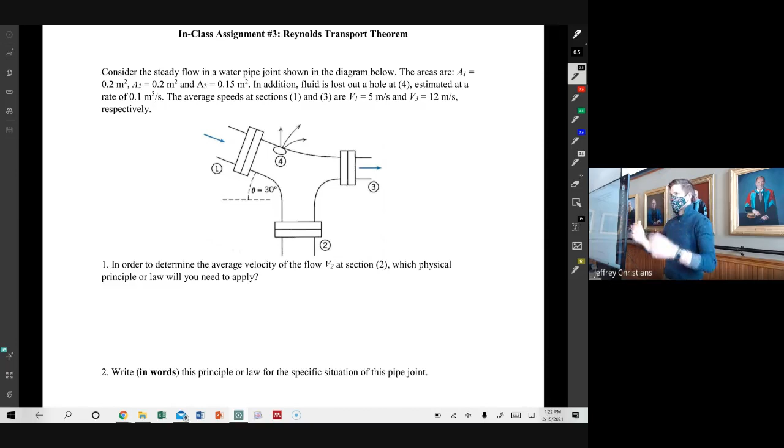So we're going to take a simple problem and make it a little more complicated, but hopefully in the end that gives us more flexibility with what we can solve. We can solve things we can't just think through and rationalize our way through—more complicated, more interesting things.

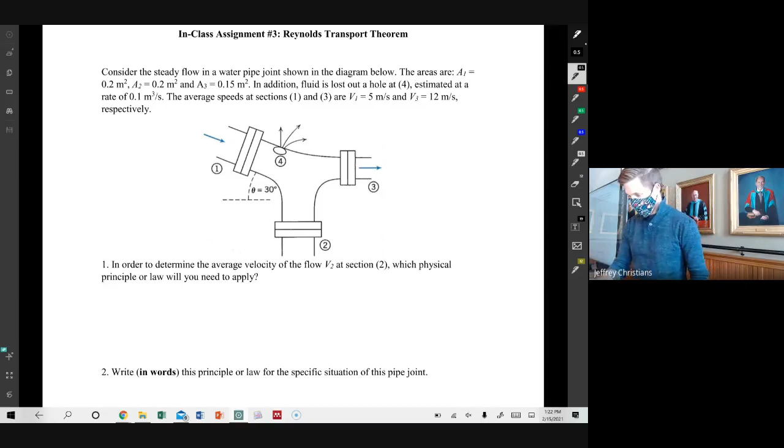So this is moving from statics, which was chapter 3, to chapter 4. Our discussion is going to be on what we'll call the Reynolds transport theorem. That's what we're going to be talking about in chapter 4.

We won't define it today, but we'll at least get started on our way to what that even is. It's a way to apply physical laws, like you would in physics, to fluids. So, what do we typically do? We typically apply physical laws to a mass.

If we wanted to do conservation of energy, we'd look at a specific amount of mass. If we wanted to do conservation of momentum, we'd look at a specific mass and say conservation of momentum on that mass, with a force acting. For F equals ma, we'd look at a specific mass and ask what are the forces, what's the net force on this specific object. So typically in physics class and other engineering classes, we're looking at this object and looking at forces on it, energy in it, but we're looking at a well-defined object.

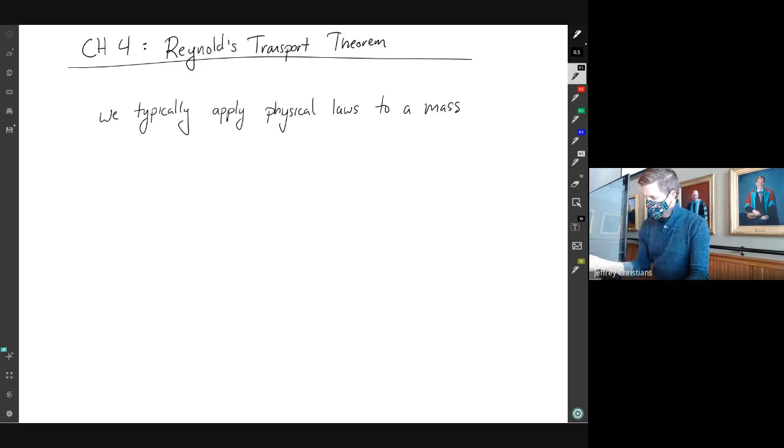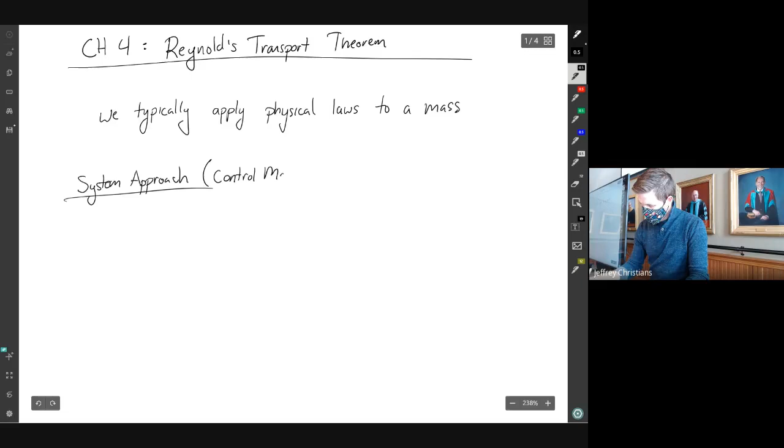This is what we call the system approach, or the control mass approach. This is normally how we apply the laws of physics.

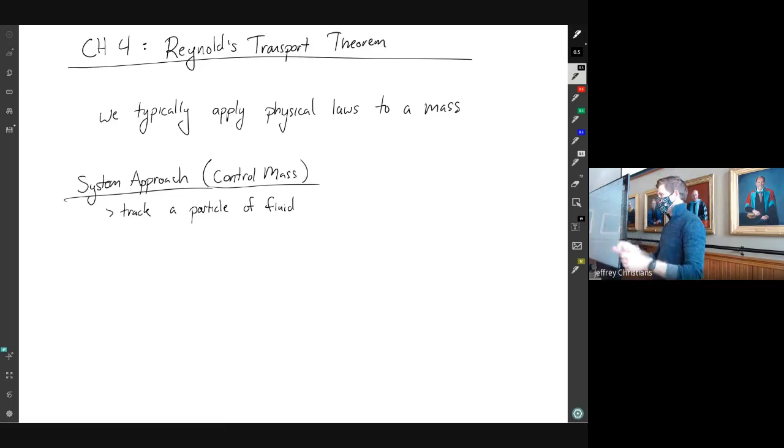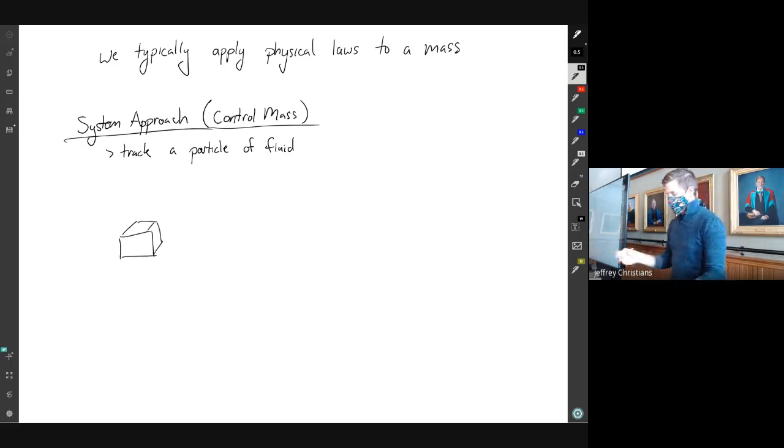If we were to do something like this in fluids, what we would do is track a particle of fluid, or a group of fluid. We would look at this chunk of fluid and say okay, it's right there at time zero, and something's going to happen to it. Forces are applied, and it's going to move somewhere else. So we'd look at this moving from there to there. Basically we're trying to watch where it's moving, this single group of fluid particles.

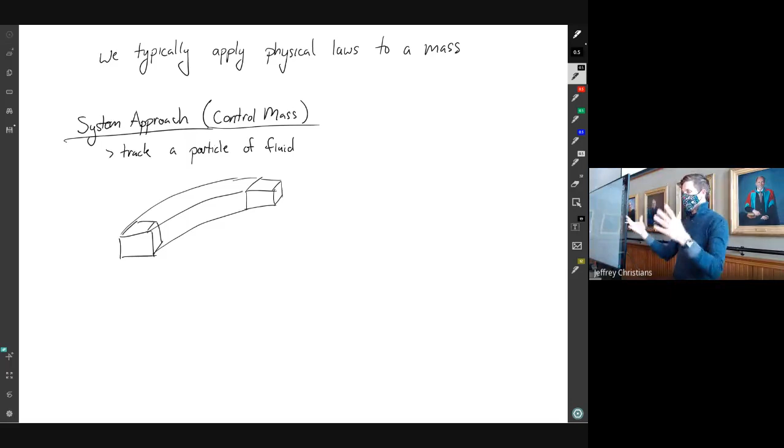With conservation of mass, we'd say the mass of that chunk of fluid doesn't change. If we were looking at F equals ma, which we will later, we'd say the forces on that object are related to the acceleration of it as it moves. So we'd have something of defined mass and watch it move through a fluid.

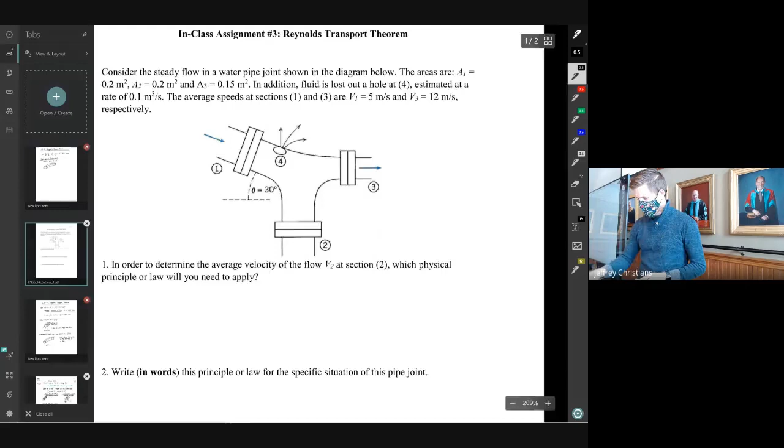What we did when we solved the previous problem is we did not actually track the fluid. We could have tracked the fluid coming in and watched where it went, that particle coming in and having to come out somewhere, tracking where it comes in and where it goes out. That would be one way to look at this, but in fluids it's often easier, not always, we'll use both approaches, but often easier than watching an individual particle move along its merry way.

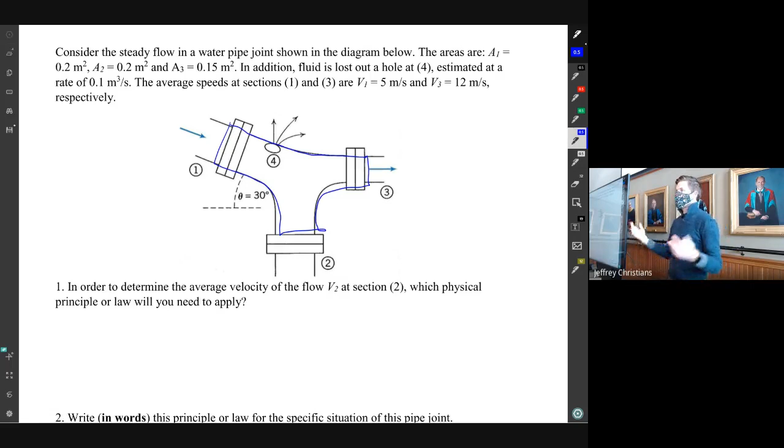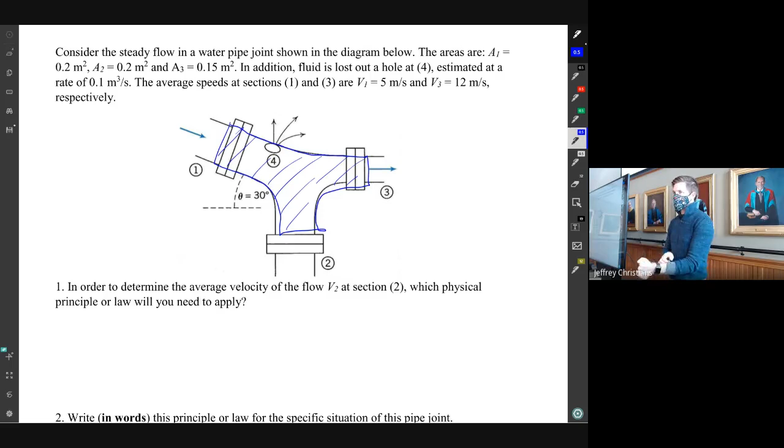Instead, we're going to do what you guys did, which was say we're going to look at this volume, and say what's coming into that volume and what's leaving that volume. So a lot of times in fluids, we're going to watch a specific region of space and say what comes into that region and what goes out of it. We'll do it with mass like you did here, but we're also eventually going to do it with things like F equals ma, with momentum, and with energy using the first law. You could use other physical laws too, to understand how fluids move and flow and how forces work.

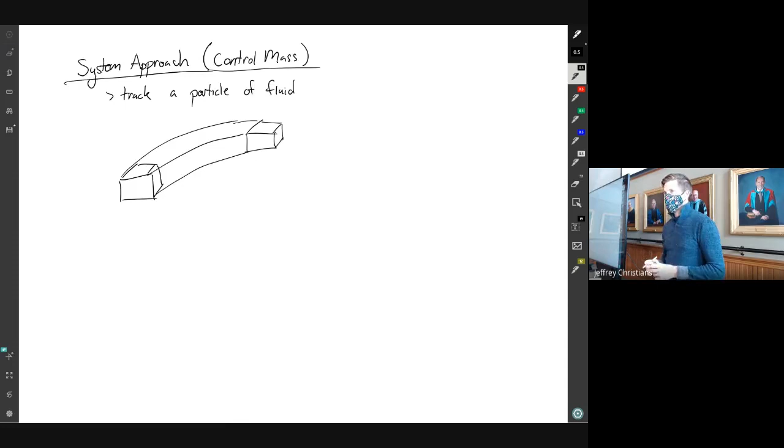So that's kind of what we're building to. The system approach is how we normally think of physical laws, but a more useful approach for fluids, a lot of the time, is a control volume approach.

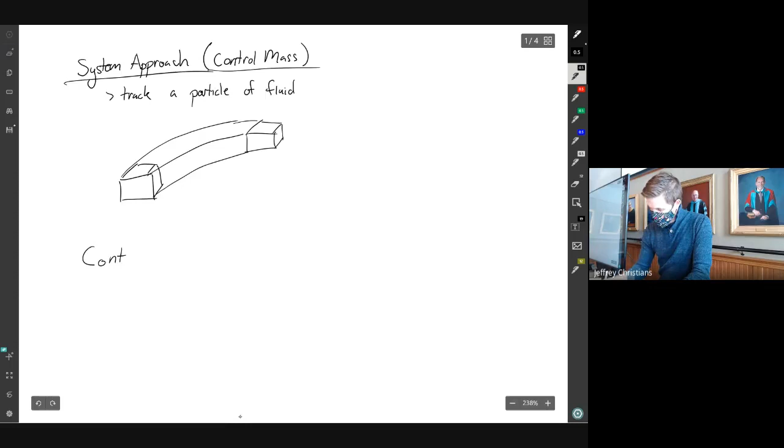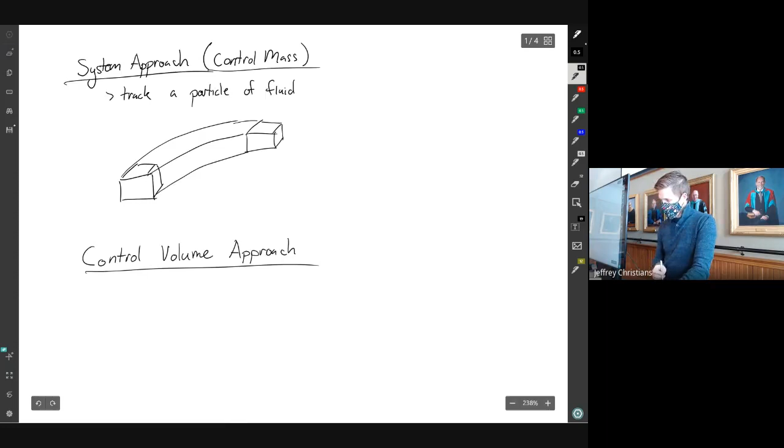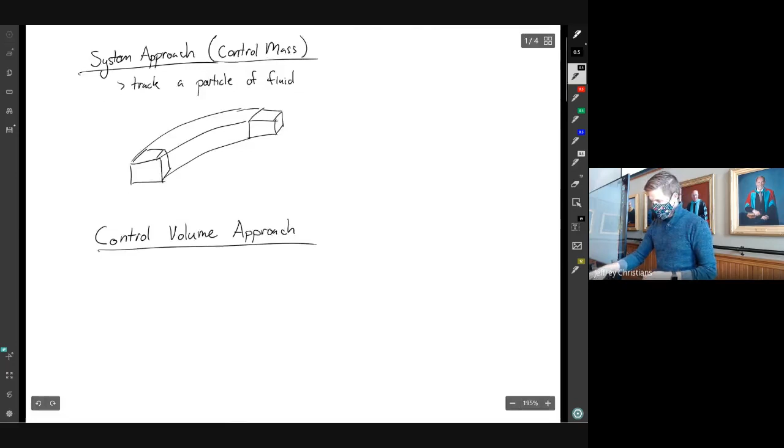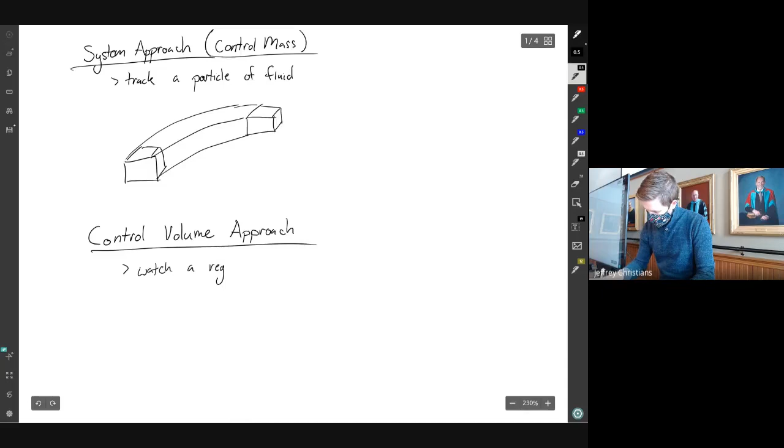Okay, so in a control volume approach, we are going to watch a specific region of space. That's how we're going to be looking at the problem.

So all of our physical laws change a little bit. Because if you think of conservation of mass, that's the easiest one. Conservation of mass means if you have a particle of a certain mass, the mass doesn't go up or down, it's conserved. If you have conservation of mass on a specific region of space, now you have to say, okay, what's coming in and what's going out, and is there any accumulation inside of our region of space? You have to account for more things.

So that's what we're trying to do, is say, take something, how does that work? How does conservation of mass work for an individual particle? Mass is conserved. And then how do we expand that to watching some arbitrary region of space?

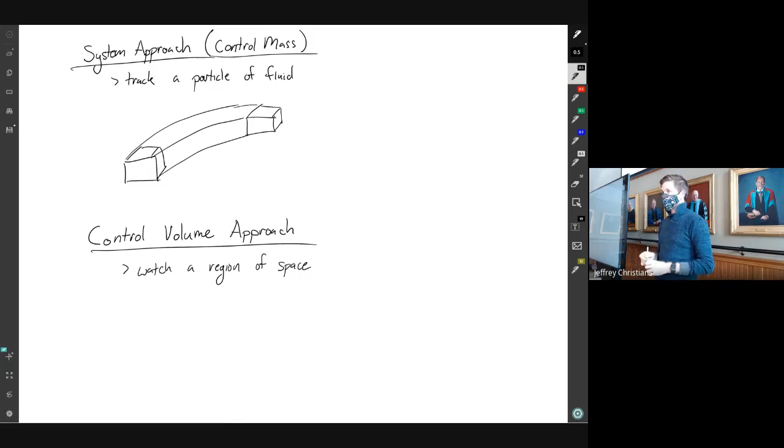So this would be, just to draw a simple picture, we would have some region of space where this is our CV. It doesn't have to be a box. And we would have flow kind of going through that box. And we would be watching the box, not really watching the flow.

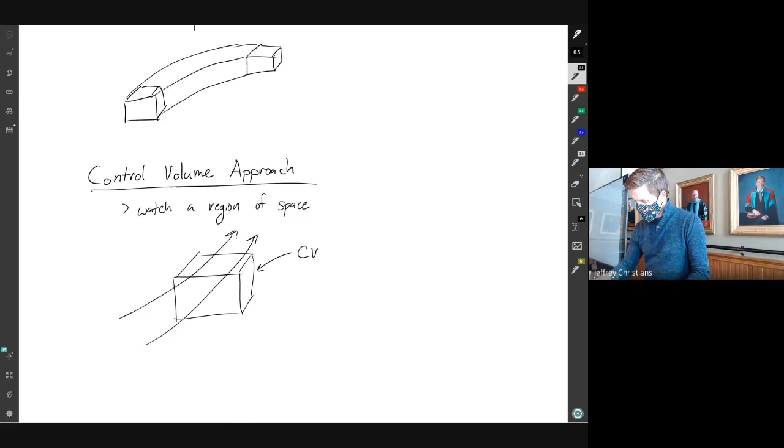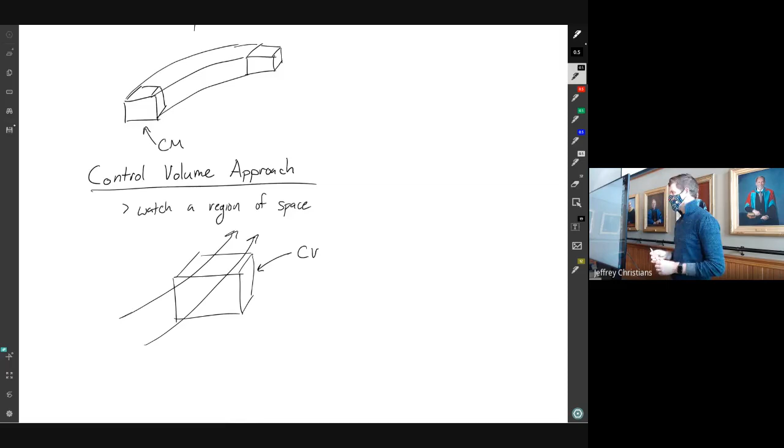So the first one, we're watching this particle. So this is our control mass particle. We're watching that particle move through space. The second one, we're watching a region of space and watching things move through that region of space. There's kind of a subtle difference, but it will become important in how we think about it and how we use that. We'll end up using both of these approaches, but we'll start with the control volume approach, and that's what we're going to work on for the next while.

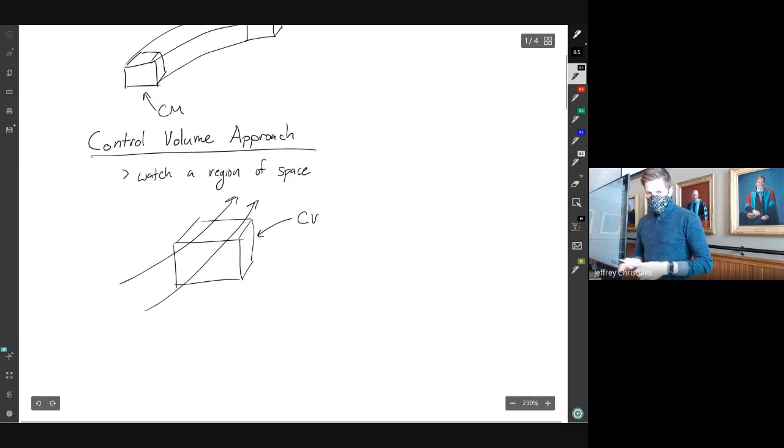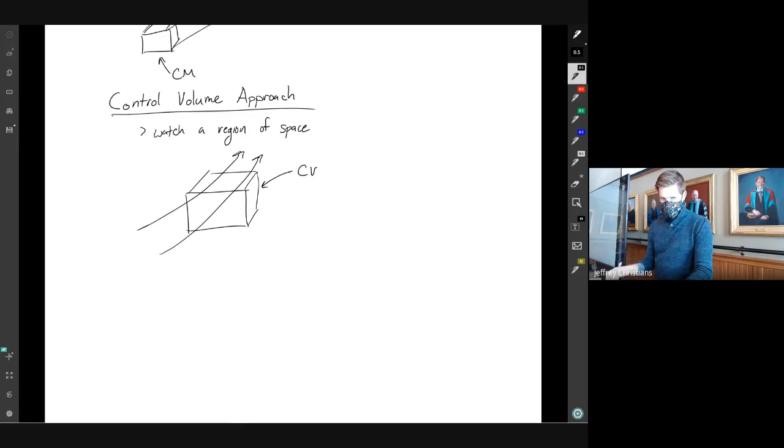Okay. So if we wanted to write an equation for this, in words at least, we could write that. So we could look at the CV picture.

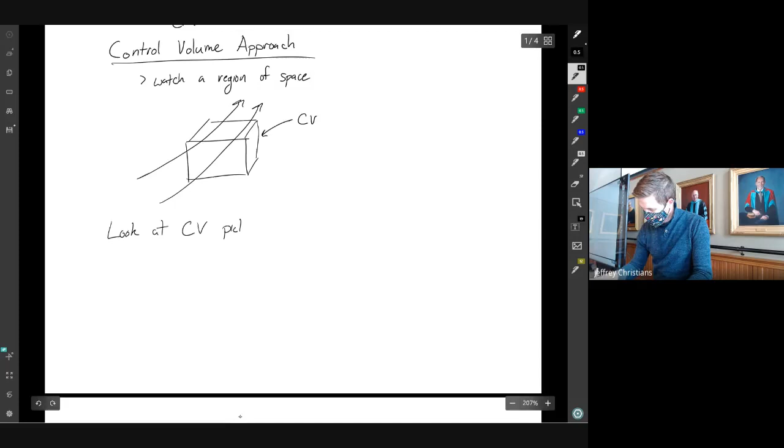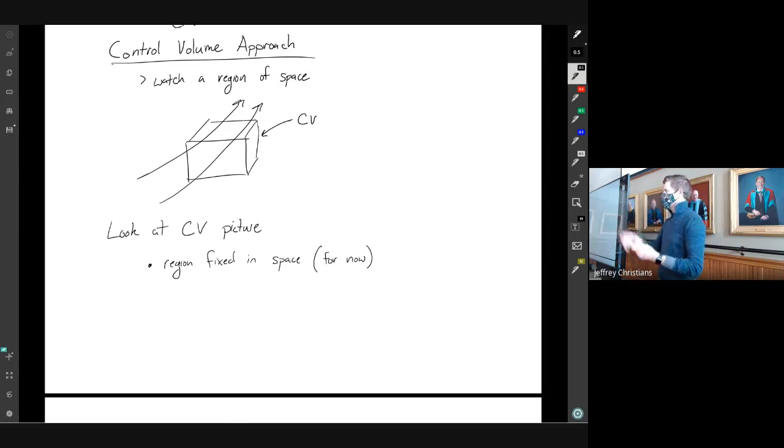So we're going to say that this is a region fixed in space, stationary, just like a set region of space. For now, eventually we can actually take that region of space and we can move it. Sometimes that will make our lives easier. For example, if you want to figure out thrust from a rocket engine as your rocket is taking off, your rocket's moving. So if you're just looking at the launch pad, a couple seconds later your rocket's not anywhere near the launch pad, and you go, well, that's dumb, you should follow the rocket. So eventually we'll actually move along in space, but for now it's a fixed region.

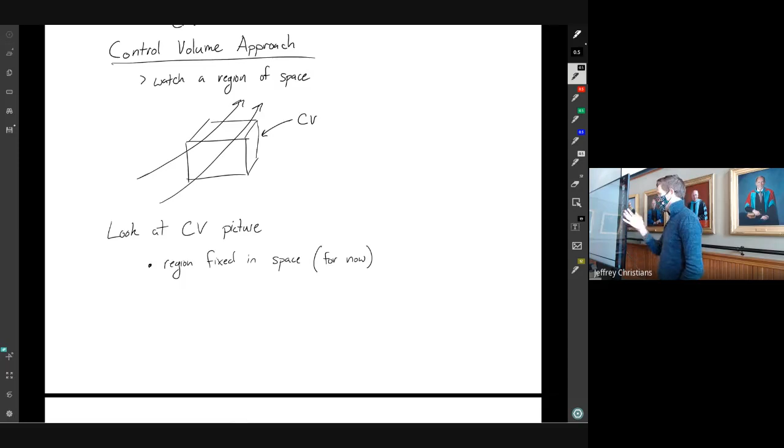Okay, so we're going to look at a mass moving in or out of our control volume, crossing the boundaries of our control volume. And if things are moving, they're moving with a velocity. So we're going to have velocity measured relative to the CV surface, what we'll call the control surface.

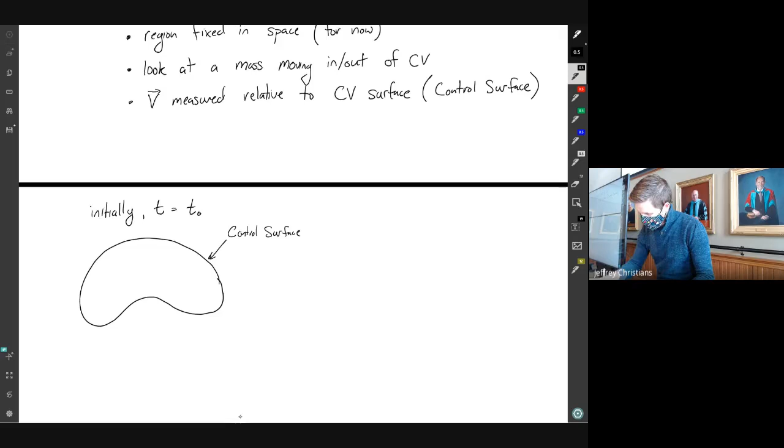Okay, so I'll draw an arbitrary picture that hopefully will help us think through this a bit. Let me draw that better. I want to draw a shape that I can draw twice, like a lima bean. So this is initially, at time t0, the initial time. This is our control surface, the black line, the surface of our shape. The shape itself is the CV.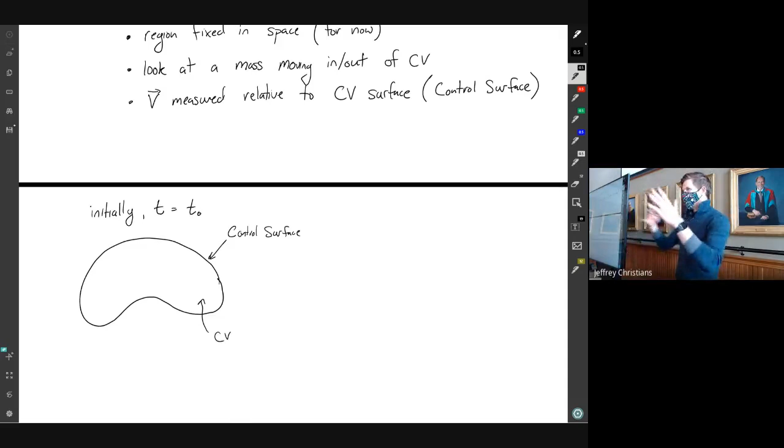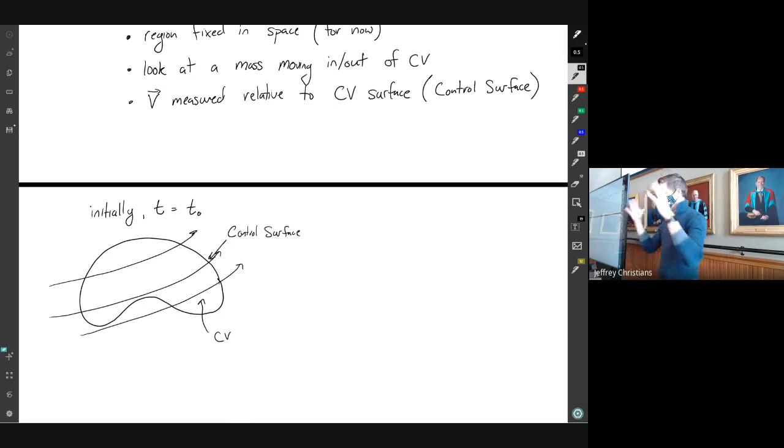We, in general, have fluid moving in and out of that, so just for the sake of drawing it, we can draw some flow superimposed on top of that, those would maybe be the streamlines. Okay, so initially we're going to say this is what our control volume looks like. It's in a flow, this funny lima bean looking shape. Let's take a snapshot there, and then we'll take a snapshot a little bit later and see what happened.

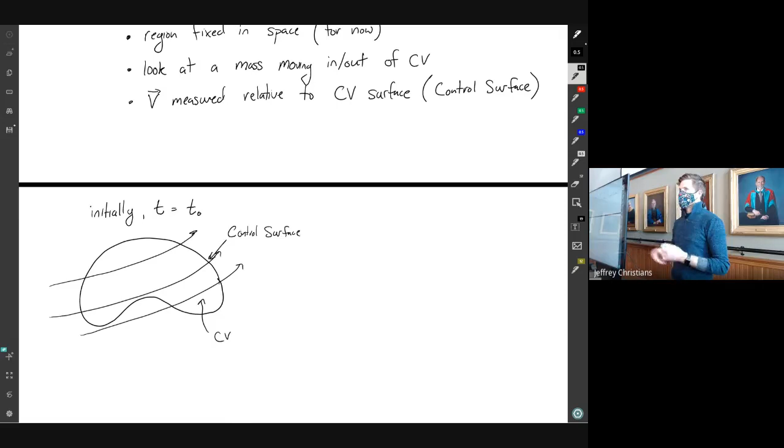So a little later, at t equals t naught plus a little bit, plus d time, if we try to take the same shape, and I'll do my best... that's not very good, try again.

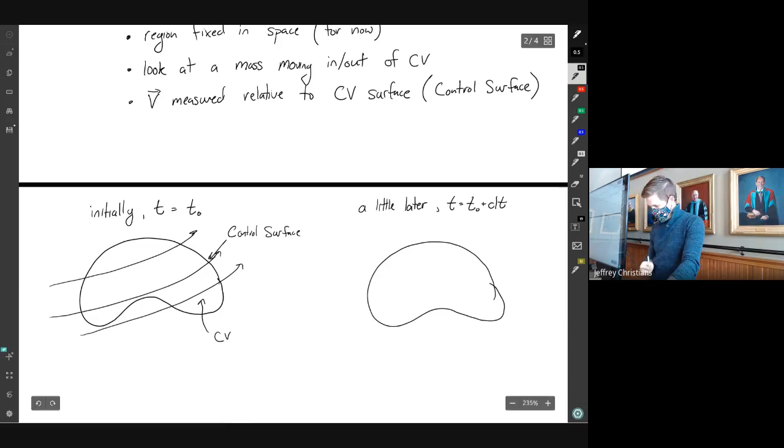Maybe okay, you can tell it's at least supposed to be the same shape. So what happened a little bit later? Well, our fluid moved. How did it move? It moved, well, here's our velocity still.

Say that didn't change. So the fluid is moving that way, kind of along with those velocity vector lines. So again, I'm just going to kind of eyeball this, but I think you'll get the idea. This would be something like that. So our initial fluid is the dotted line.

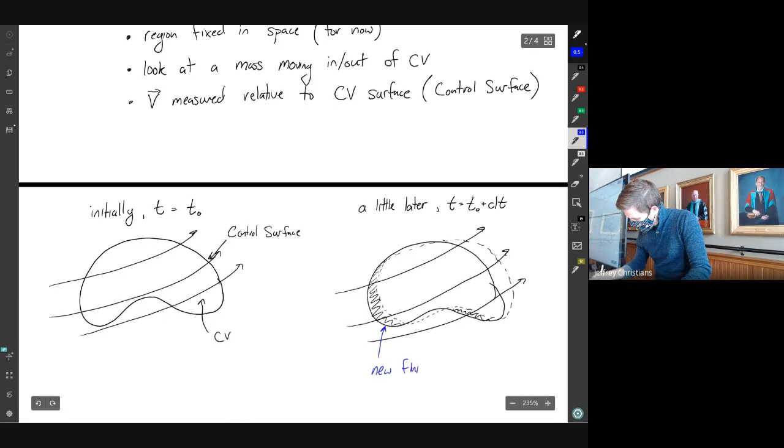Our CV is still the black line. So we would have here and here. This would be, put in blue, this is we have kind of new fluid that's entered into our control volume. Okay, and then here, we had fluid that left our control volume, or fluid that went out of our control volume.

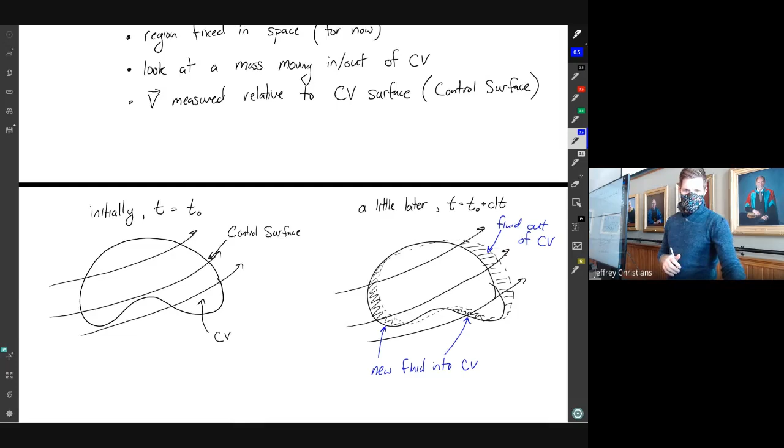What we want to do is write this in calculus, calculus and vector notation. So we're going to have, I guess, two things. We're going to have to be able to look at what's inside of our control volume.

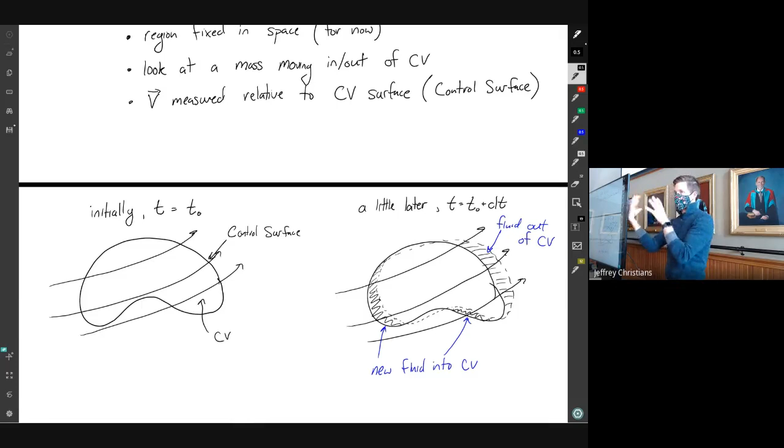That's what we care about, really. We're going to have to be able to look at how does that change if it does, because in general we could have more mass building up inside of our control volume, or mass changing with time inside. Conservation of mass tells us we can't have that, but that's okay. We can have more mass flow into our tank, for example. If our control volume is a tank, we could have more mass flow into our tank.

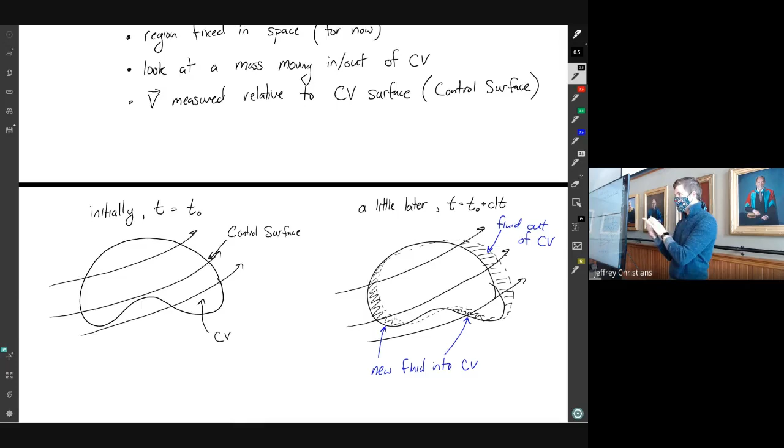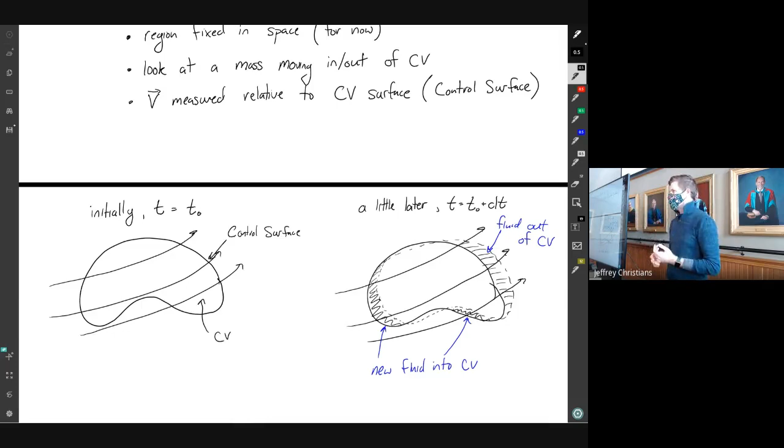So we have to consider that. We have to consider how much is coming in to our control volume, and how much is leaving our control volume. We can do that, the flow rate in, flow rate out, just like you did on the in-class thing, it was density times velocity times area. We just have to make it more general because we may have any different shape and any kind of velocity.

So that's kind of what we're trying to build for. So let's write this in calculus. So let's write the general conservation of mass equation for a CV. So we have to start with what is just the physical law for conservation of mass.

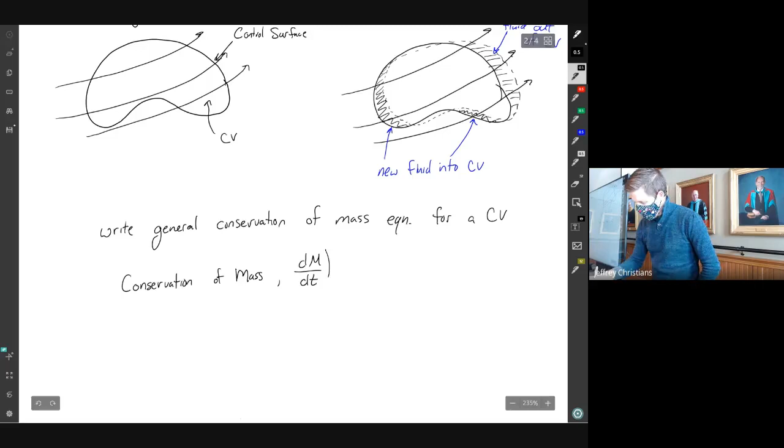So how does mass change with time for a system, for like an individual particle or an individual mass? How does mass change with time? It doesn't, because it's conserved. So this is equal to 0. So this is like the physical law.

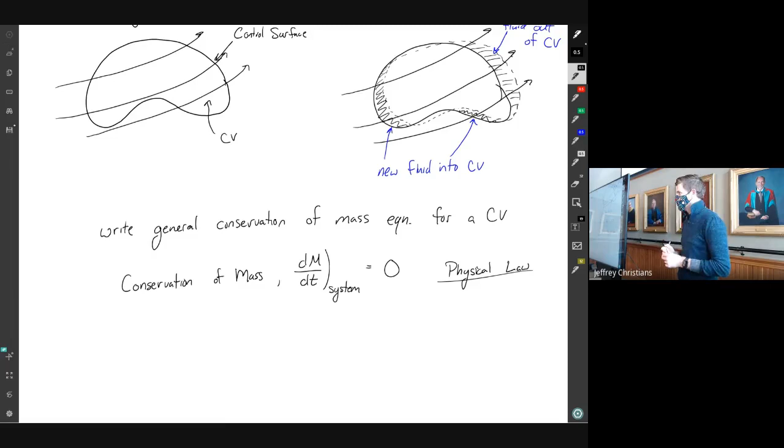Right? And again, as we start to expand this to other physical laws, not everything is a conservation law, but we're going to have to look at, okay, what is the actual fundamental physical law that we're looking at? In this case, mass is conserved. So that would be here, a 0.

This is telling us that for a system, mass is conserved. So in the universe, mass is conserved. Okay, that equals, well, there's going to be potentially accumulation.

So how would we track accumulation? Again, in kind of our general generic shape, we'd have to look at the mass of the stuff inside of this shape. So how do we do that? Well, we would take the density of the stuff and add it up over the whole volume. But potentially that could be different at time 0 versus time a little bit later versus time a little bit later.

So that could be changing with time. So what we're going to do is look at the time derivative of, okay, we're adding up density over the volume, so that's an integral, over our control volume, over the whole shape, density d volume. Okay, I told you that we were going to get to kind of weird notation to make a simple thing hard.

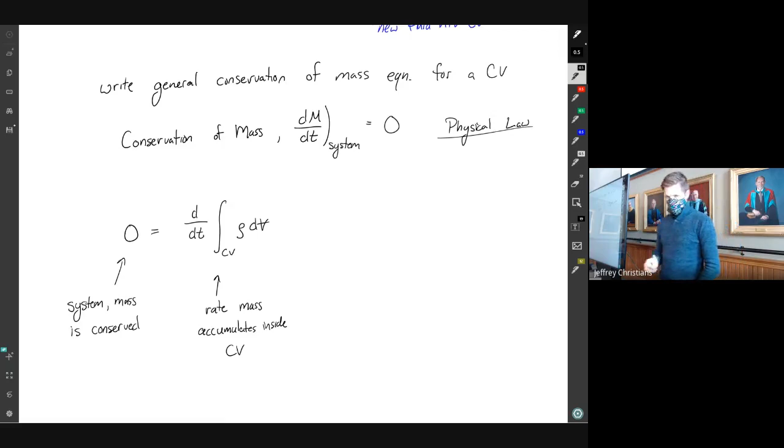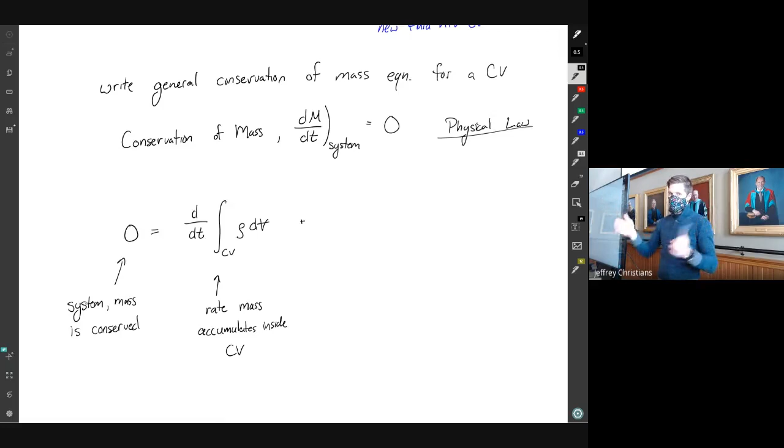Then the second part, we're going to be watching what? We're going to be watching mass come in and mass go out. Okay, so we're going to say mass could come in, mass could go out. That's going to be related to, just like in the example that you guys did, that was density times velocity times area. Okay, that was the mass flow rate in or the mass flow rate out.

We're going to be doing velocity times area times density over the whole outer surface, because we're trying to look at what's crossing that outside surface. So that's going to be another integral, this time over what we call the control surface, of density, velocity, dot, dA. So that term, this is the net mass flow out of our CV.

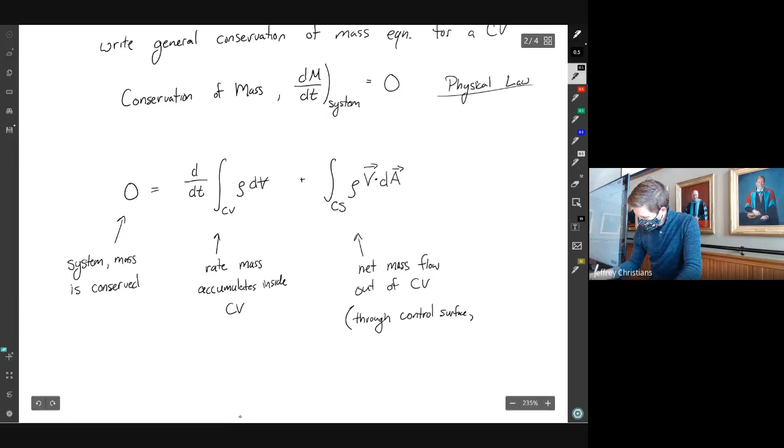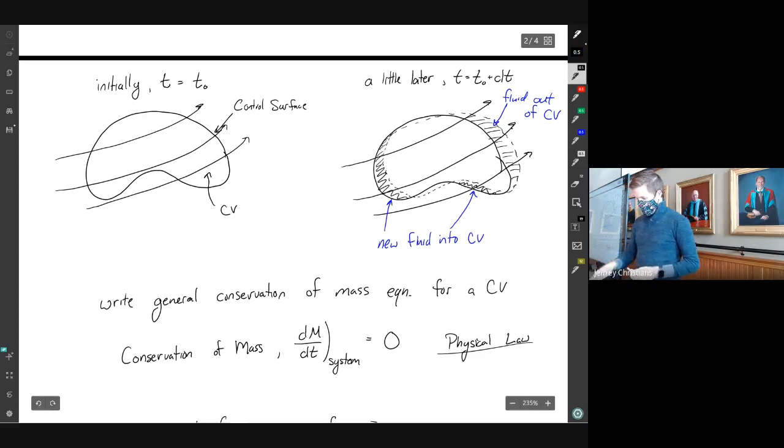Okay, so across that boundary, across that surface, which we call CS. For example, the fluid that moved from right here to right there didn't leave, so we don't count it. We're only counting the stuff that I shaded in this example, the stuff that actually came in or actually left. So I told you it would take a simple thing and make it ugly and hard. I wasn't lying.

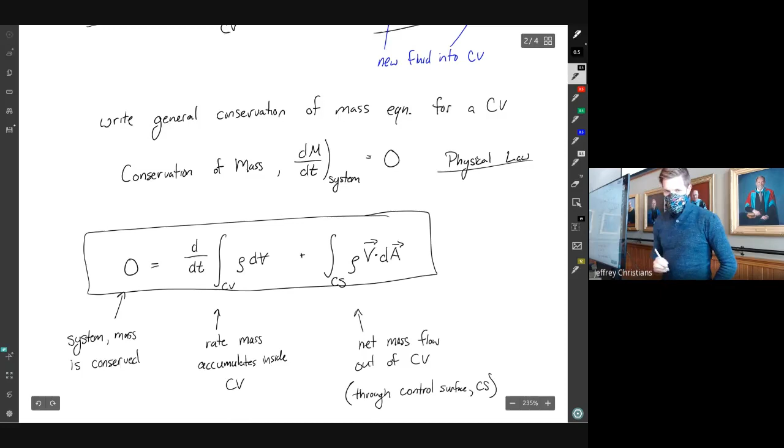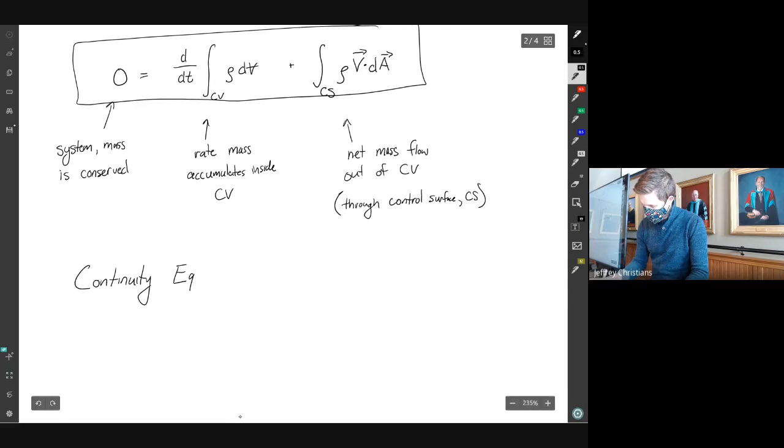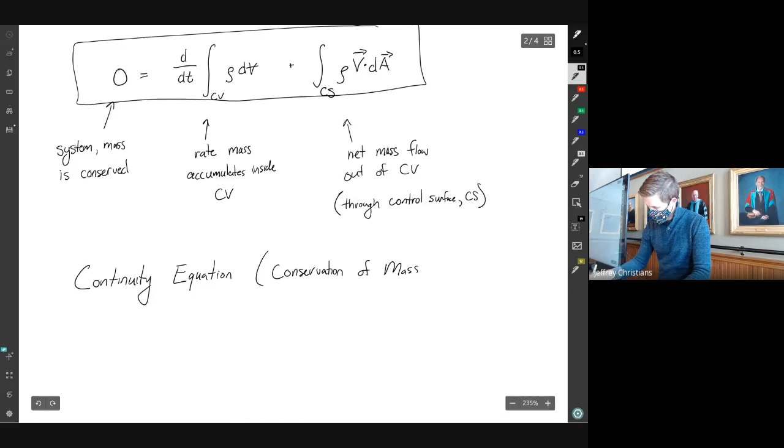This equation, this is the continuity equation. So it's really like conservation of mass. We often in fluids will call conservation of mass, instead of that, we'll call it the continuity equation, or continuity, meaning the stuff can move, but you can't magic stuff out of thin air or have that stuff disappear. So you have to be able to track it, and it has to obey conservation of mass.

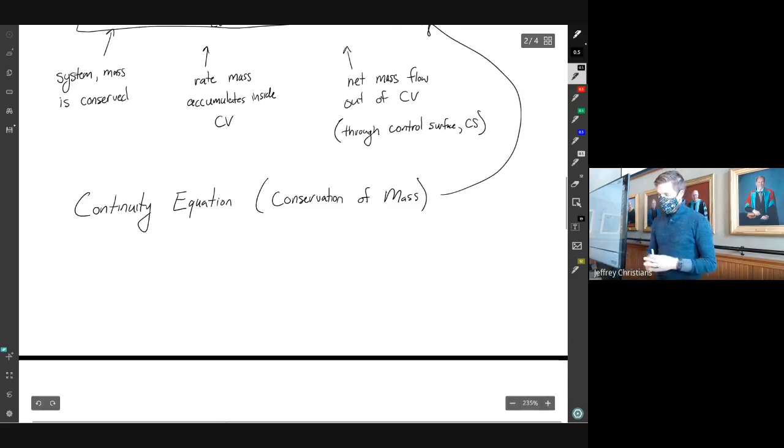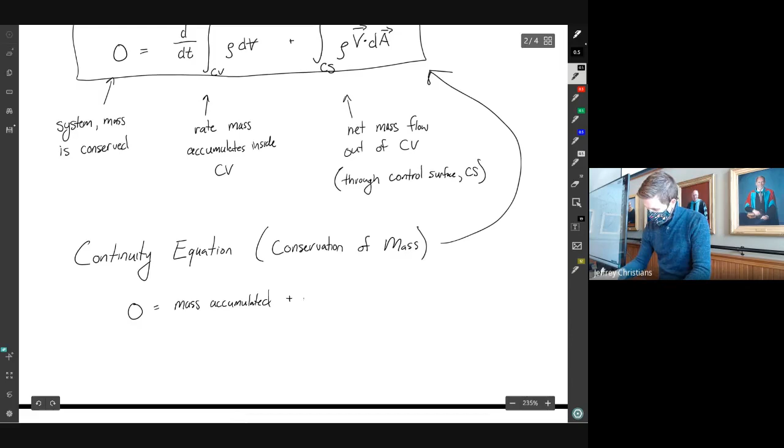Right, all it's saying is that 0 equals mass accumulated plus mass out minus mass in. That's all that, right? It's this kind of goofy looking notation, but that's really what it's saying. If you look at it, at least in words, that hopefully jives with what you were trying to do in this in-class assignment. Yeah, Brennan?

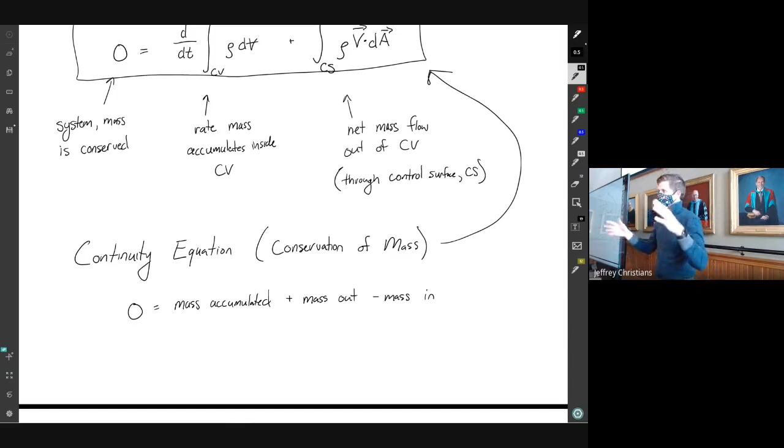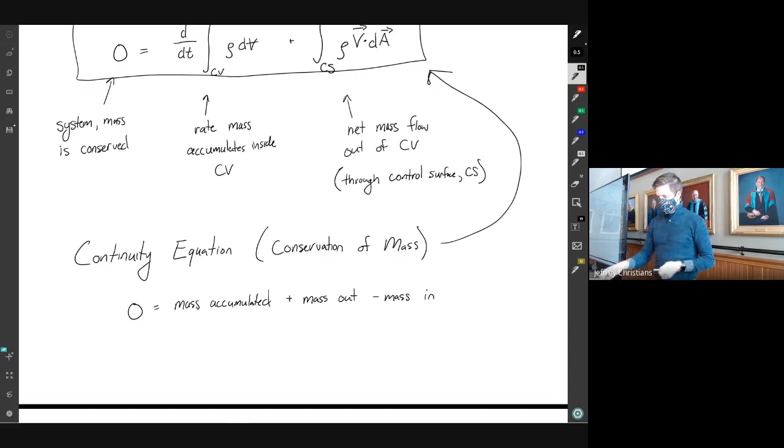So if you were imagining filling up a tank with water, if your control volume is your tank and you have one hose coming in and a leak at the bottom, you could be filling it up. How much is coming in? How much is actually filling up inside of your tank? How much is leaving out the leak at the bottom? So you're going to be having potentially all of those terms. In the system that we solved, there wasn't an accumulation term. It was just what comes in must go out.

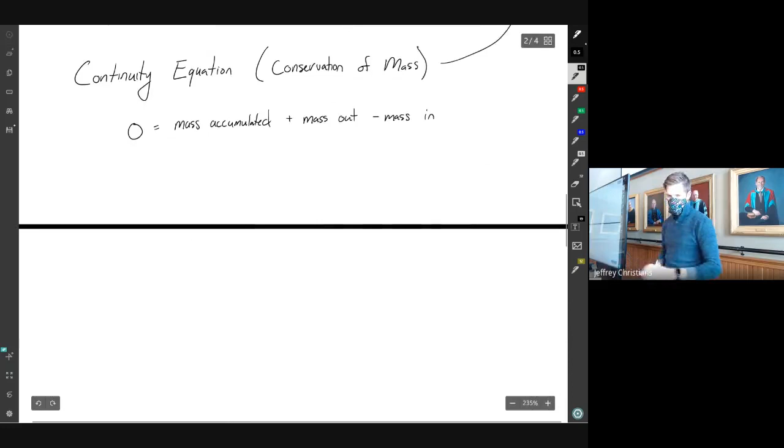So all right, we'll just finish this. A special case of this, and we're not going to get to an example today, but a special case is if we have steady state flow.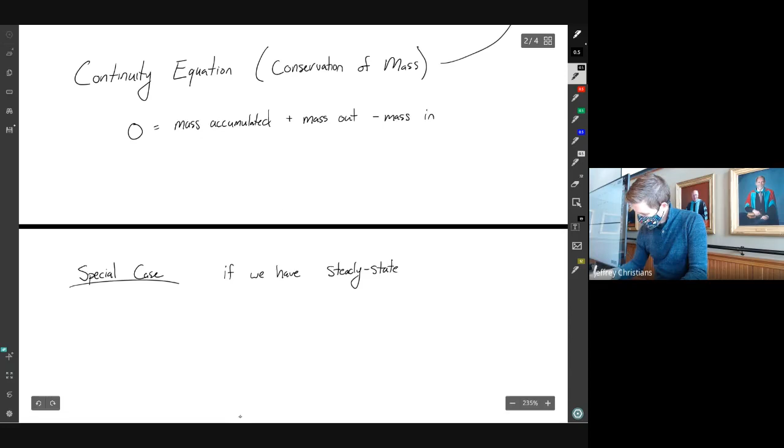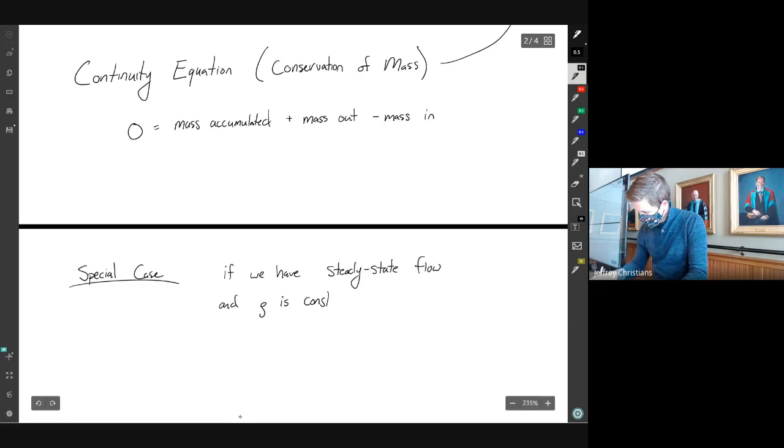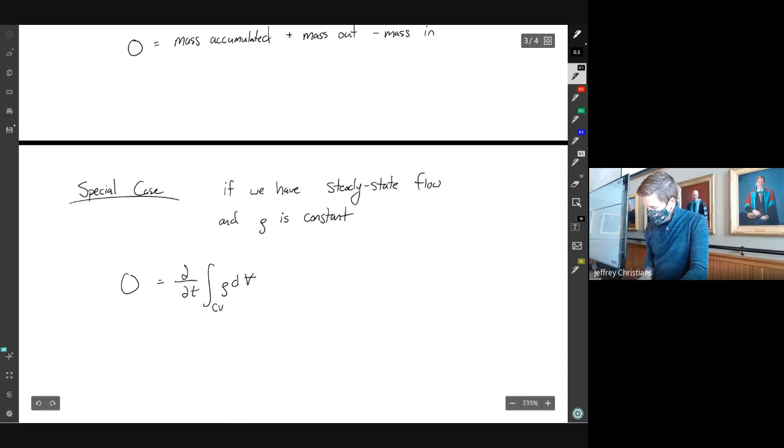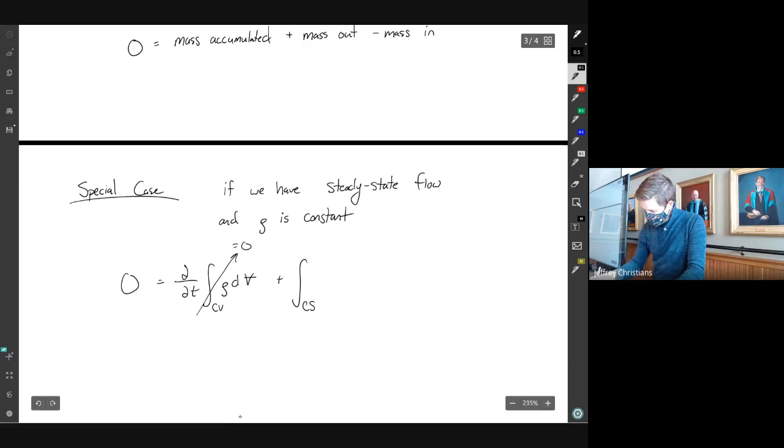And density is constant. So if these two things are true, if it's steady, if the flow is not changing with time and density is not changing with time, then we get 0 equals d dt of rho dv. Things would not be changing with time, so this whole term would be equal to 0. Rho v dot dA. So for this special case, we would get 0 equals the integral for a control surface of rho v dot dA.

So this is what you guys all solved. You just did it without starting from the strict math notation. You just did it because you could figure it out in your head. So the challenge is, we have kind of two challenges. One is to be able to get from this weird math notation to actually figure out how to apply it to a system that you could already solve in your head. So why do we make it more complicated? But we did that because we're going to say, okay, now this framework can be applied to anything, things that we couldn't just think through and get to the right answer in our heads.